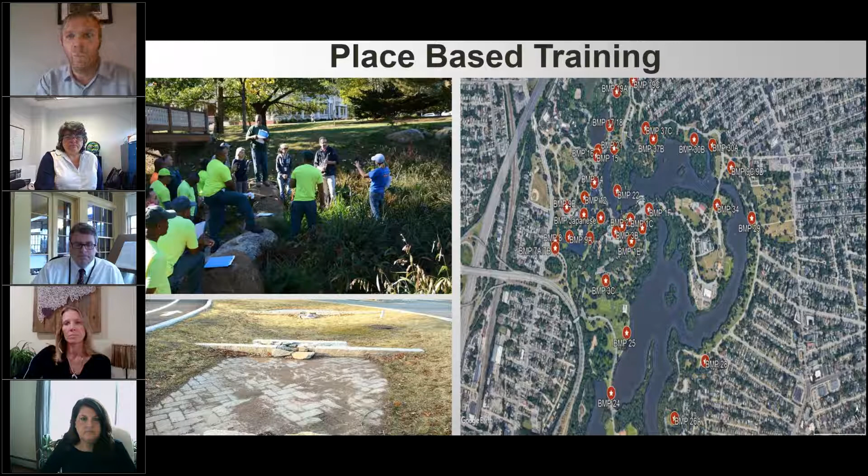At least that's how it works when we're not in a pandemic. Now you get a webinar with some talking faces, a few pretty pictures, but you still get all the knowledge, so hang tight.

We also want to better understand how these green infrastructures function, and so we are working with the University of New Hampshire and the University of Rhode Island to monitor some of these BMPs to see if their real-world performance matches what is being modeled and designed. Also part of this monitoring, we want to see what level of maintenance is required to keep these systems functioning.

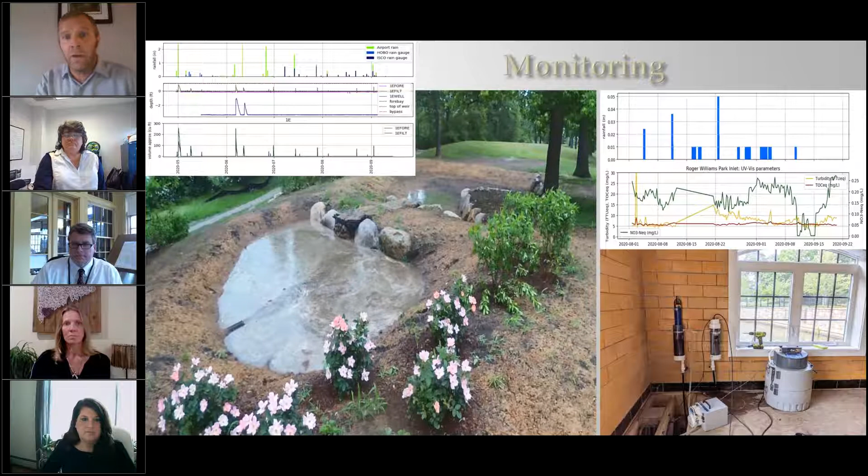They've also installed continuous water quality monitoring equipment in the ponds to try to figure out if all these BMPs are actually changing water quality in the ponds like they're designed to do. And then all that data and information collected from this research is incorporated into some of the different trainings that we host at the Innovation Center.

Our last area of focus at the Innovation Center is to engage and educate the local community about stormwater and about green infrastructure and how the public can make a difference in their own homes. So we do things like give public tours of the BMPs, give general talks about stormwater, put up signs in the park near the BMPs to explain what they are and what they do. We also participate in multiple volunteer monitoring programs to get neighbors from around the park involved in the different types of data collection that we are doing.

And most recently, we held a stormwater-focused arts festival where artists created murals near some of the BMPs, to draw attention to them and raise awareness about stormwater and water quality.

So that's a brief overview of the Innovation Center. We've got a great group of presenters that have an immense amount of knowledge about stormwater management and construction oversight. I will quickly introduce them and we'll get to the presentation.

Brian Burns is the Deputy Superintendent of the Providence Parks Department. He's a graduate of the University of Rhode Island with a degree in urban planning and resource development. He has over 30 years of construction experience, started with the Providence Parks Department in 2015, and now manages projects in over 120 parks around the city.

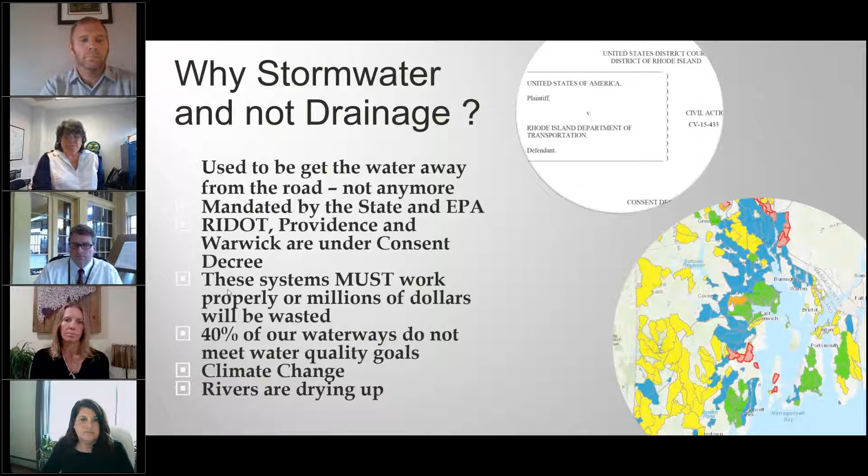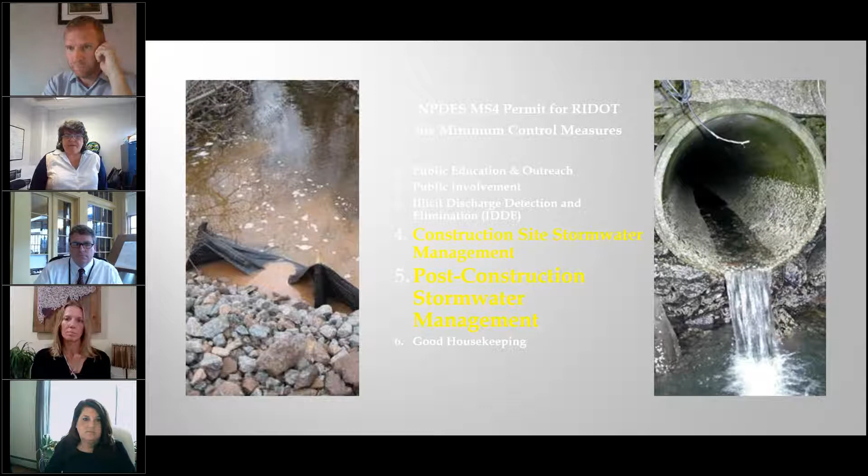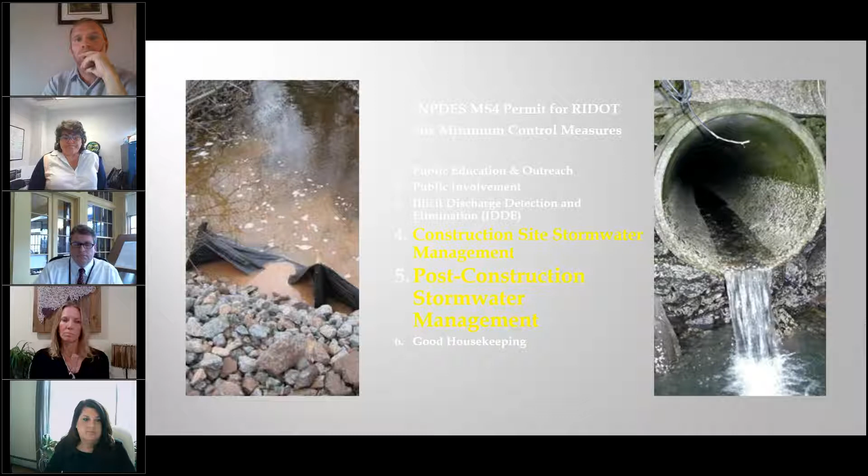So there are 6 minimum measures that every large municipality is required to meet. What we're going to be talking about today is the 4th minimum measure. This is a permit that is issued by the NPDES program, the National Pollutant Discharge Elimination System. So we're going to be talking today about construction site stormwater management, very little, but mostly about post-construction stormwater management - after the job is done, is the water getting cleaned prior to discharge into a river, stream, pond, or lake.

So what you're going to see today is really the building blocks of stormwater. You might hear terms like BMPs and STUs. They are pretty much the same thing. The state of Rhode Island calls it a best management practice, a BMP. EPA calls it a stormwater treatment unit, an STU. So if you hear these terms back and forth, they pretty much mean the same thing.

What is required is building a unit that will accept water. If you see on the far right-hand side, there's always some kind of an inlet. So water has to get into this unit.

And then it is pre-treated, which means that we're trying to drop the sand and large solids out of the unit, out of the stormwater stream. And then there's usually some kind of weir or overflow or way for the cleaner water, without all the sand, to go into, and most of the time infiltrate.

So if you look on the left-hand side, you'll see a curb inlet, and then paving stones for pre-treatment, then a weir, and then this bioretention system that is supposed to infiltrate the water into the ground and get it away from the road, into the ground and out of the rivers and streams directly. But if that gets overwhelmed, it goes into that overflow - you see the grate on there.

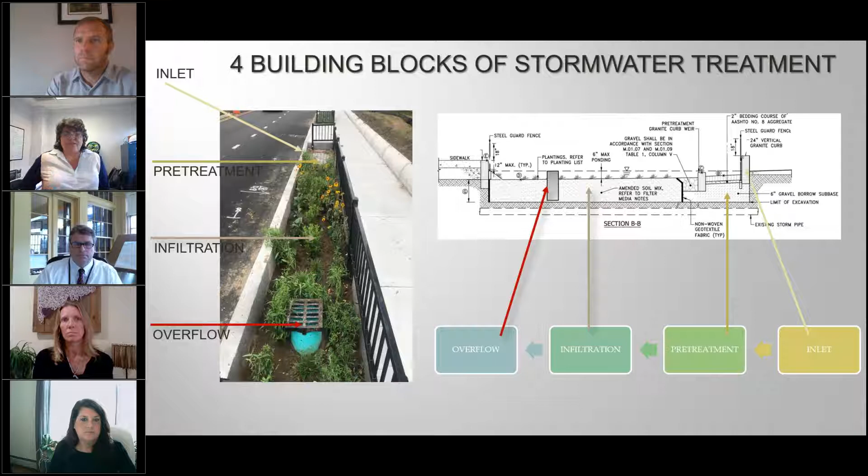Hello everyone, I'm Brian Burns, and that was a great explanation of stormwater. You're going to find those four elements in almost every stormwater site or BMP that you're going to be involved in.

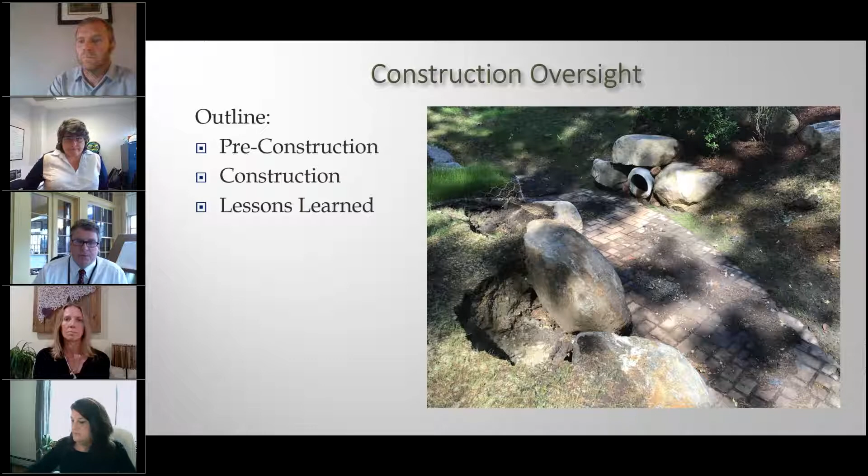So it's pretty simple. Today we're going to talk about pre-construction, which is almost just as important, if not more important, than the construction itself, the construction aspects, and then lessons learned, which we should always do - look at every project at the end, what we did right, what we did wrong. I think that's a big part of what the Stormwater Center is doing now.

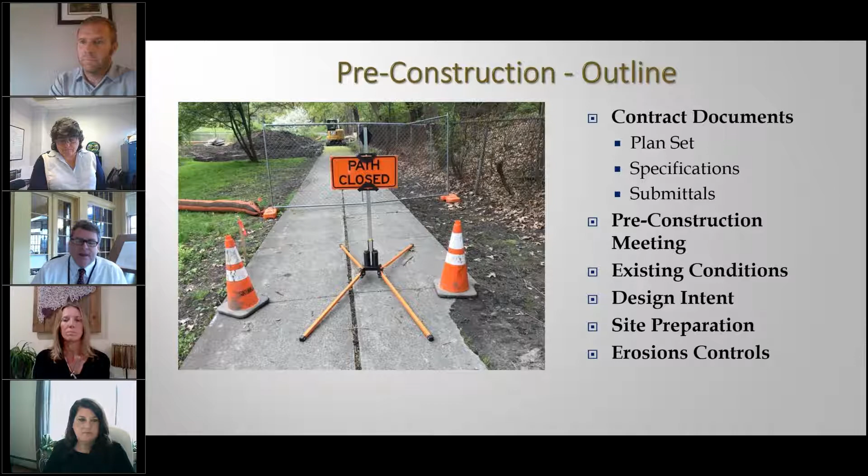So for pre-construction, we're going to talk about the contract documents, the plan set and specifications, pre-construction meetings, existing conditions - where most of your change orders end up coming from, not documenting existing conditions properly - the intent of the design, the site prep, and the erosion controls.

So we'll start with that pre-construction meeting. First and foremost, I see most of the mistakes made in our construction projects here when plans that are issued for construction are not on the site. So you as a contractor, you're bidding plans for bid - there could be alternates, different conditions that exist that change those plans prior to construction. Many times I've gone to the site, we stamp our plans for construction so everyone knows those are the correct plans, they're dated, and more often than not, I see the wrong plans on site. That can cost the contractor money, the owner money.

It's a big problem. So existing conditions, photographs, and the restrictions - like I said before, that's where all the change orders come from. If you haven't documented what you have there, you're going to be hitting utility lines, elevations are going to be incorrect. And dig safe should always be contacted.

And then in addition to that, if you have electricians that work for you, if you have entities involved in whatever site you're at, please get them involved, ask them for the information that they have. A lot of times the people that maintain these sites have the best information about what's there. So really do your research before you put the shovel in the ground.

And then as always, you should be aware of any special conditions, permits, NEPA restrictions. At that point, you want to identify the project team - the contractor, the owner, the engineer - all knows who needs to know who to go to. And there should be one sole project manager that's responsible for everything that takes place on that site, and that should be the last person to make the decision.

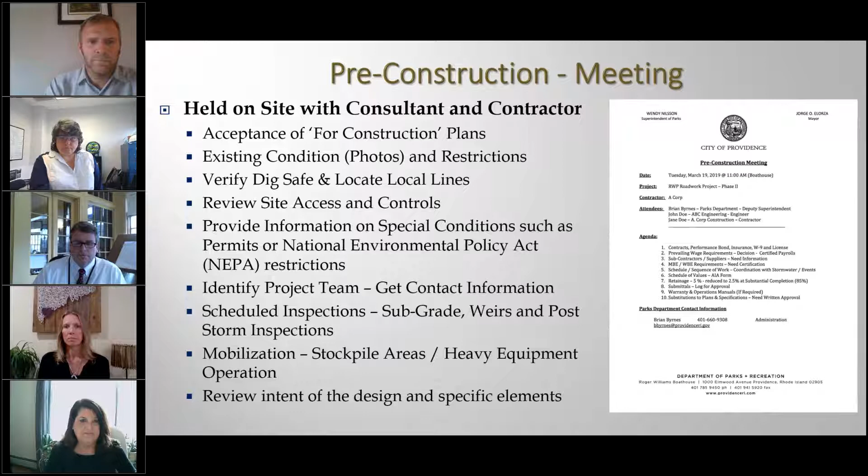Thank you, Chris. So after the pre-construction meeting, once you get underway and put a shovel in the ground, you need to do ongoing site reviews.

The construction set is very, very important. I often ask the contractor to look at his set of plans, so I'm not carrying 30 sets of plans in my truck. We also utilize iPads and electronic equipment to keep those plans and maybe keep your truck a little cleaner. Construction details - you've got to know what the assemblies are.

You could have an infiltration basin with layers of different types of sand, stone and media. You need to know what it's supposed to look like when it's done so you can make sure it's done properly. A lot of times the honor system is in place on these construction projects, and with reputable contractors that can be fine, but you need to know what you're looking at, and you need to know those materials need to be kept separate.

Most important on these earthwork project sites is a construction entrance. Make sure it's maintained as a stone construction entrance - that's pretty clean right there, but as the site goes and we get rainstorms, it starts to get mucked up. If that stone isn't removing debris from the tires, that debris will end up on the roadway, which ends up in a catch basin, which ends up back in probably the waterway you're trying to protect. You've got to make sure that's maintained.

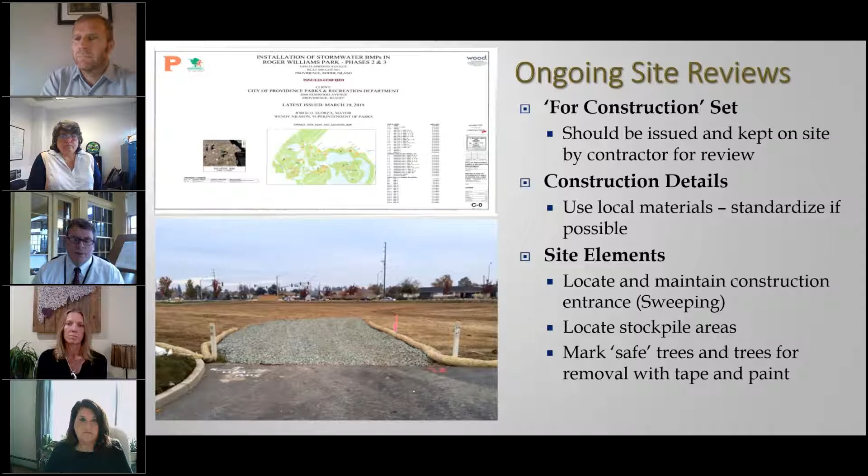When it comes to trees, you'll typically have trees on a site designated for removal and trees indicated to stay. We've used ribbons in the past. We found that if trees are supposed to come out, marking them with paint is a permanent mark, and we'll make sure the right trees are getting pulled. So we ribbon trees to stay, and we mark trees to go.

Another part is material submittals. You're managing 5, 6 projects, you've got a lot of different things going on. There are some real off-the-cuff things you can do to make sure the materials being put in are correct and the right materials are arriving.

We submit on shop drawings, so you need access to the shop drawings and submittals, because that's going to tell you the products approved for this project. It's an easy way to confirm compliance - if you have that data, it tells you what the product is and where it's coming from, and that's easily verifiable when you're out in the middle of the site.

The test data you receive, sometimes done prior to a project manager getting involved, needs to be current. If you get a loam sample tested and it's 3 years old, that loam isn't the loam that's going to be coming to your site. So that test data needs to be current and accurate, and it needs to be approved before it gets there. Then those submittals will tell you who the vendor is.

So if you have a loam sample that you approved from ABC gravel yard, when the driver pulls in with the loam, walk up to him and ask for his slip. They're going to get a slip when they leave. If it says XYZ gravel yard, you know that material is not the right material. So it's a very easy way, without getting into the details of submittals, to verify that the materials coming in are correct. So, packing slips, bills of lading.

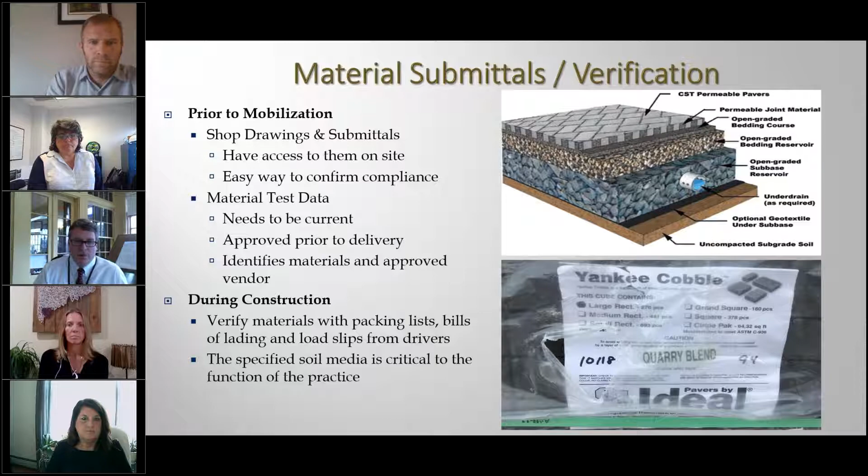Most importantly, in stormwater elements, is the soil media. It is engineered specifically for the task it's been drawn for. If it's not the right media, and/or if that media has been compacted, it's not going to function, and therefore your practice will not function. So you can't look at a pile of soil media and tell if it's the correct one or not. You need to see a slip from a vendor that identifies the product and where it came from. There's no other way to do it. You don't have the equipment to do that.

Another easy way is with samples. You can have samples of granite for wear, hardscape materials. We ask for 5-gallon buckets for bulk material, like that soil media we were just talking about. Any plants that come to your site should have a tag on them. Sometimes at nurseries, they'll tag one or two plants with a certain ribbon with dots on it, and if those plants come in with that dotted ribbon, you can assume it's the correct variety. But depending on the time of year, it may not be leafed out, so it's difficult to tell if those plants are the correct plants. You should require that those tags come on the plant when they get to the site, and then also make sure they are removed once you've approved the planting and we're at a warranty or punch list stage. Removal of tags should always be on your punch list if they're still in place.

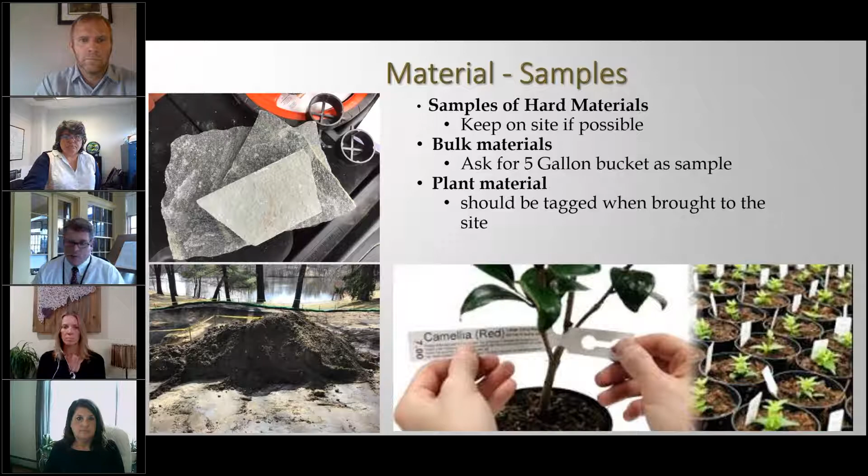So, existing conditions and restrictions - we're going to ask Heather Hamilton from DOT to talk a little bit about this. Heather. Oh, actually Brian, this is coming up in a few slides. I'm going to talk about this.

That's right. So soil performance data should always precede construction. You may be doing an infiltration basin and putting 18 inches of material onto existing subgrade. If the test pits or core samples have not been done, the design only works to the end of what you put in, or the improvements that you made. It doesn't take into consideration the soil that's there. So again, this may not be something a project manager is looking at, but you've got to know that where you're installing these things, it's going to work.

There could also be other things like easements, environmental land use restrictions, which can get very complicated and could be very site-specific, remedial action work plans, and then permits from DEM, and the requirements of those things. So a lot of this is done before you get involved, but you need to know that. You need to know what it is, because you're responsible as the owner of the property for the containment of the soils that are on your site.

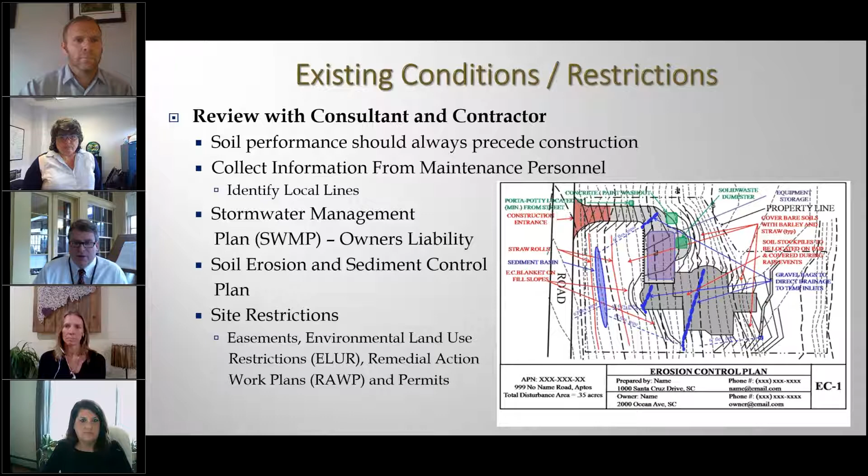The elevation's critical. We deal with this all the time. Elevations are slightly off, and 6 inches can make a big difference when it comes to stormwater. So everything has to be accurate. Hopefully your consultant has done their due diligence and provided you with the correct information. You don't want an open road or an open highway and find out that your pipe is 8 inches higher than it should have been, or lower.

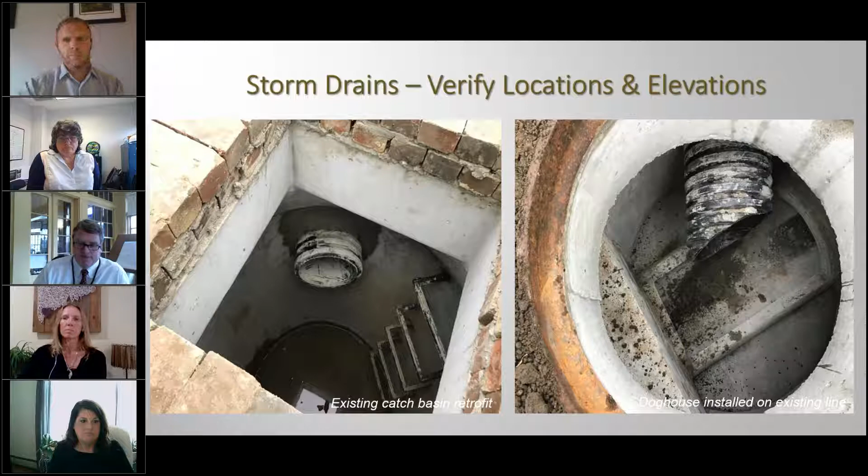We can talk about materials, we can talk about where to put it, but the bottom line is, what are we looking to do here? As Elisa captured it earlier, you as a project manager need to know how this thing's supposed to work. It's not always intuitive. We're going to talk about catch basins on the roadway that are designed to take all of the water, and then there's catch basins that are designed not to take all the water.

Most contractors, when they put in a drain basin, make sure it's in the lowest spot. Well, that's not always the case. You need to know, because what's intuitive to you and what a contractor may suggest—hey, it's actually lower 30 feet down the road, why don't we change this all over and go 30 feet down the road—there could be a design intent not to have it in the lowest spot. So you need to know that.

At that pre-construction meeting, I think Chris talked about it, you want to really get down to how this thing's supposed to work, where the water's supposed to come in—those 4 basic elements. How's the sediment coming out, how it's getting filtered, and if it overflows, where it's going. So that's basically it.

This is pretty simple stuff. Get the water and sediment into the practice, remove the sediment, and contain it in a place where it can be removed mechanically. Slow down the water, because when you slow the water down, the sediment tends to drop out—that's how we get the sediment removal. Direct it to the filtration area. Stop stormwater from entering your waterways unfiltered, and have an overflow in place for larger storms to prevent damage.

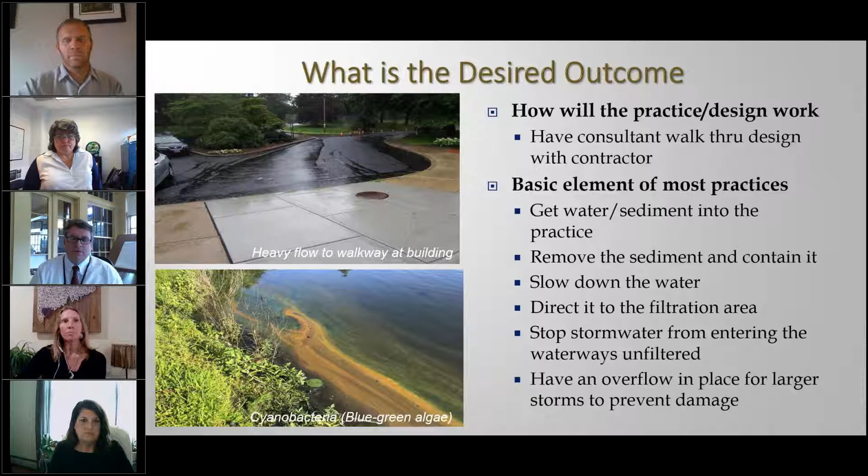Hopefully, the easiest thing to do is have that overflow be part of the existing infrastructure, so you're not spending a lot of money and you're not reinventing the wheel on this particular site. If there was a pipe that brought it to your waterway directly, if you can utilize that for your overflow, that's going to be the most economical way to do it.

So here now we're going to get more into the erosion controls and some of the aspects of those plans we talked about. I'm going to ask Heather Hamilton to take it from here.

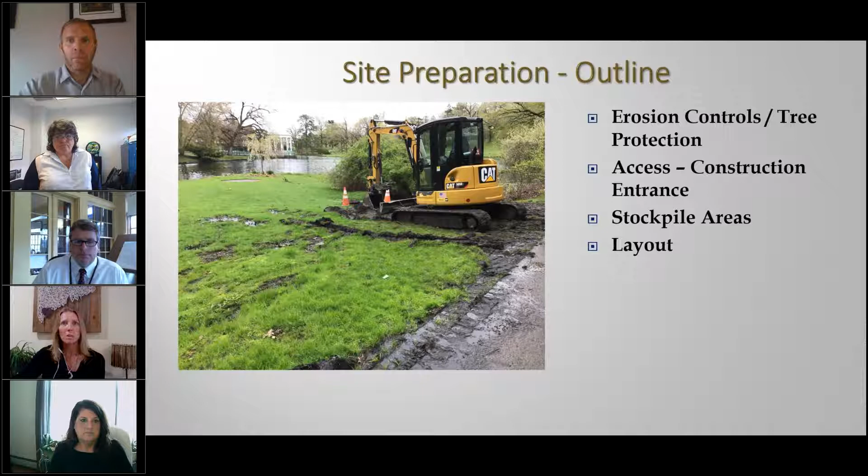Thanks, Brian. For site preparation, most of this will be guided by your site plans and your stormwater pollution prevention plan, also known as a SWPPP, or Soil Erosion and Sediment Control Plan, the SESC. Your site prep will consist of everything from erosion and sediment controls, tree protection, creating construction access points for your equipment, where you're going to store and protect your stockpiles, and your overall project layout.

Also important here is the protection of the location of your stormwater treatment BMP. Simple snow fencing works well to demonstrate that the area should be off limits to vehicles and storage, and we'll talk a little bit more about that later.

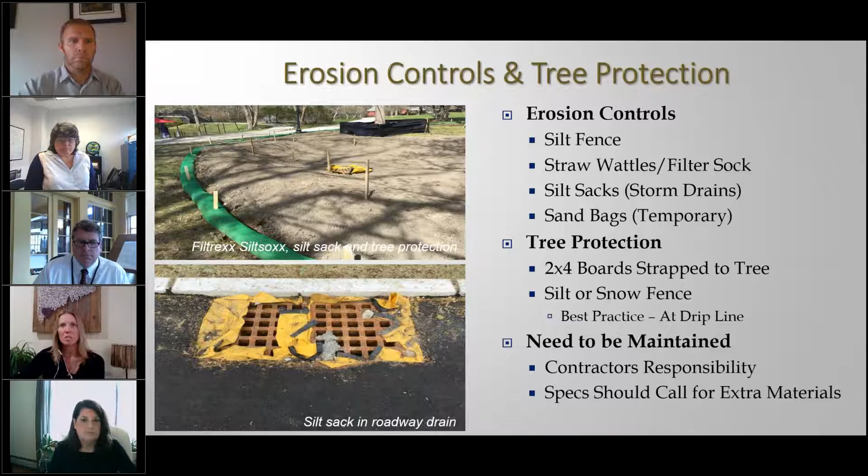So key points here are to make sure that your BMPs are properly installed prior to any earth disturbance, and that they're installed per the manufacturer's instructions or your specifications. We are not only preventing pollution from reaching our waterways here.

We also want to protect and prevent our stormwater treatment BMPs from becoming clogged with sediment and debris prior to them being completed. So you want to make sure that you have enough controls for the life of your project, and always plan to have some on site for emergencies.

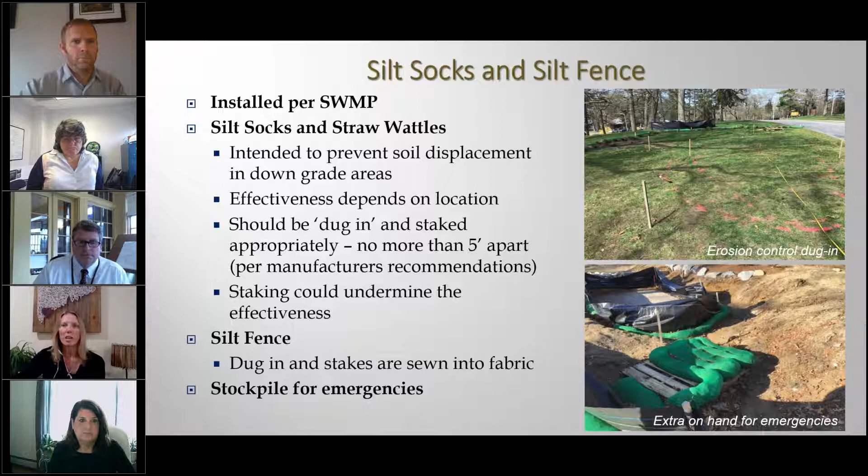All right, so at this point, you've memorized your stormwater pollution prevention plan, you've properly installed all your BMPs, but that's not where the story ends, however. We don't get to set it and forget it here.

To prevent pollution from entering our waterways, regular SWPPP inspections must be conducted to ensure that all of our BMPs are functioning properly and that any areas requiring maintenance are called out and fixed, which the contractors are responsible for. So this includes your construction entrances as well. In Rhode Island at DOT, even if we disturb less than an acre, we still require weekly and post-storm inspections.

So overall, it's in the owner's and contractor's best interest to maintain the controls to avoid costly repairs and possible reconstruction of your final product. An eroding stormwater BMP full of sediment when it's completed doesn't do anyone good.

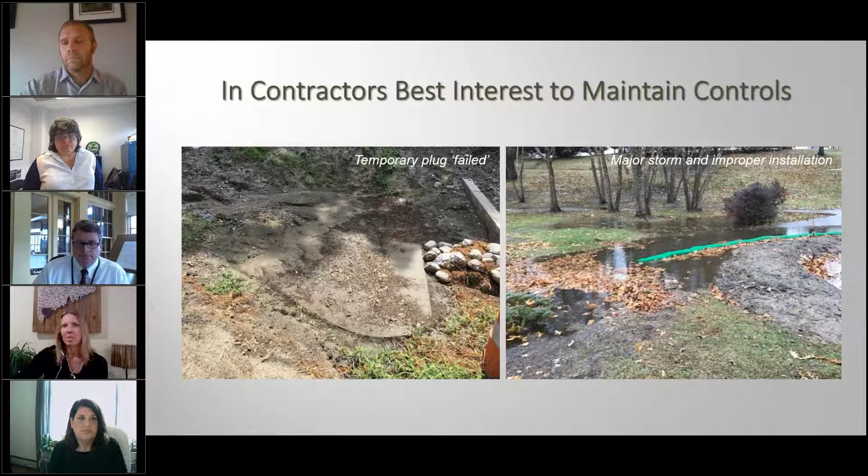Thank you, Heather. So site layout, really important. We look at a lot of plans, and more importantly, your stakeholders, people that are in your organization that may not be as familiar with construction as you are. If they're involved in the project, it's a good idea to get some layout done.

And we use the old-fashioned way. There's total stations that assist in this, and GPS, a lot of electronic equipment for layout. But in the end, there's going to be a grade stake showing elevations with a ribbon for the most part.

And I would suggest that you get out there prior to the installation starting and outline the major areas. Use marking paint on the ground, stakes with ribbons. That's helpful to you because we look at a lot of plans.

We don't realize, oh, wait a minute, that thing's going to go right across a path that everyone uses every day, and you didn't pick it up on the drawing because maybe the path was an existing path and it was lighter than the rest of the drawing, and you just didn't pick it up.

So by doing this, you avoid problems later. It's real easy to change design before the contractor started. Once the shovel goes in the ground, those costs escalate dramatically.

So locate those things so that you can walk it with the consultant, with the contractor, and somebody else in your organization may be involved in the project so that you get a good feeling of what you're doing and what this is going to look like in the end. And they can be deceiving.

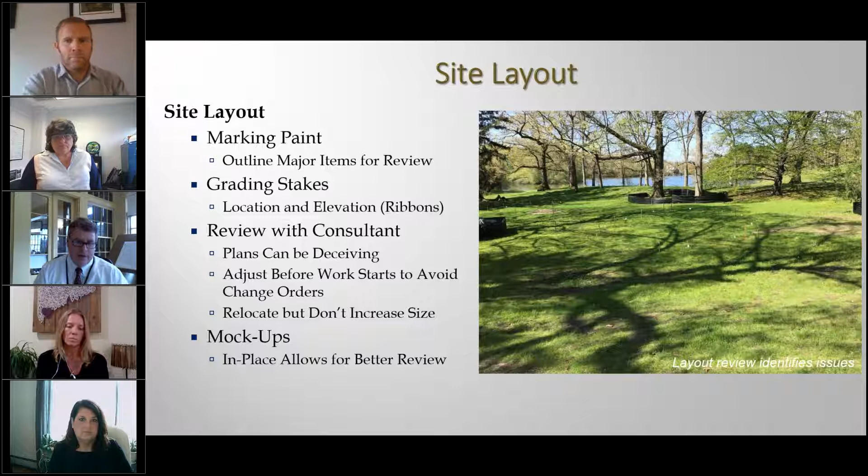Then you actually get to see what it looks like in place, and you can approve it and have them continue forward. These are things that's going to save you money in the long run and make sure the project stays on schedule and on time.

When you do your site visits, I schedule a weekly visit at the same day, same time every week. And then I show up randomly to my construction sites throughout the week. And you need to do that, not that you're checking up on the contractor, which you should be, and you are, but the contractor knows what the plan says and he knows what he's supposed to do.

But when you get to these sites and look around, you may be reminded of other things - oh, we do an outdoor movie over here, if we're moving, okay, there's a problem there. The contractor may have no idea that outdoor movies are being put on this grass area in front of your building, but you do. You've got a lot of projects, a lot of things going on. Just physically getting out there and walking it reminds you of other things they don't know about. Photographs - again, I take thousands of photographs.

It can help you later if there's some type of litigation. It gives you the time frame for the work. Someone may call and say somebody fell into the stormwater thing in January, and you can provide documents that show the construction project wasn't even taking place at that time. It also tells you the work was done correctly. Particularly for utilities, if they're installing new pipes or lines, taking pictures gives you an as-built to back up on, but a picture is 1,000 words. Look at that picture, line yourself up with a landmark that's going to remain when you photograph a pipe, so you get an idea where it is. It avoids conflicts later and protects you. Sometimes contractors give me a look when I'm out there taking pictures, but it protects them as well. We get calls for lawsuits - somebody tripped and fell - and we've saved more than one contractor from being sued themselves because we documented when their work was taking place.

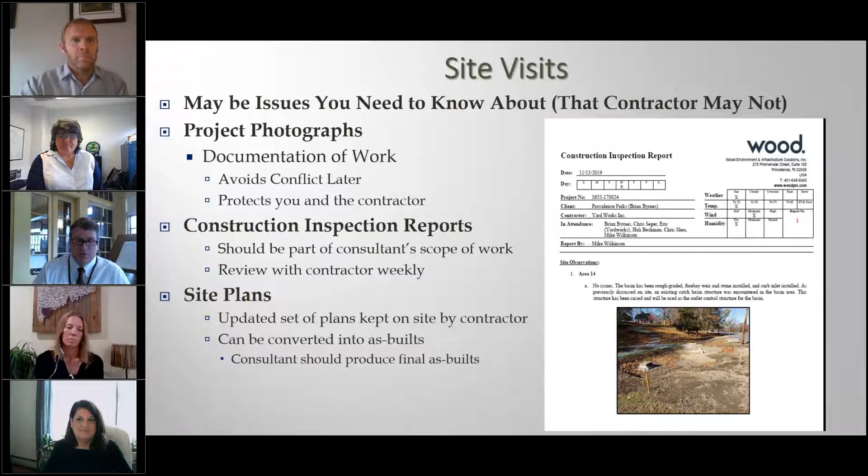Always have an updated set of plans - the contractor should maintain them on site. In the end, we're going to ask for as-built drawings - if you don't, you should be. Here in the City of Providence, we require that as-built be done in AutoCAD, and we've recently required that the consultant provide the final as-built to us versus the contractor. So while the contractor is marking up that set of plans, identifying distances, locations and changes, he would send those plans to the engineer and compensate them somehow. The engineer would incorporate it into the as-built AutoCAD drawings they already have. Part of their scope of work is to verify the as-built, so I get a really accurate set of as-built drawings in a format I can use for the next project or for compliance with a permit. It's very valuable - getting a set of drawings covered in coffee with pencil marks and somebody's phone number on them isn't as useful as a plan that comes in an AutoCAD format you can use with your design equipment. This construction drawing should be relayed back to the as-built.

Means and methods - you're going to tell somebody how much stone there is, how wide a swale's got to be, and that's kind of where your responsibility ends. The means and methods - how the contractor brings that stone to the site, how the contractor excavates that material - regardless of you identifying compaction areas and making sure they're not driving over critical items, it's up to the contractor to figure out how to get this project done.

We tell them what we want, but we don't tell them how to do it. And safety should always be the first thing.

This is the Japanese garden in Roger Williams Park, and they were installing a new weir, and this is the method they came up with. I didn't sleep much during this week that we were doing this, but they're cantilevered over the waterway on large sandbags with a mini excavator, and it was sketchy. So as long as you're confirming that nobody's getting hurt, but ultimately it's the responsibility of the contractor to make sure that his employees are safe and that the methods that he uses are correct.

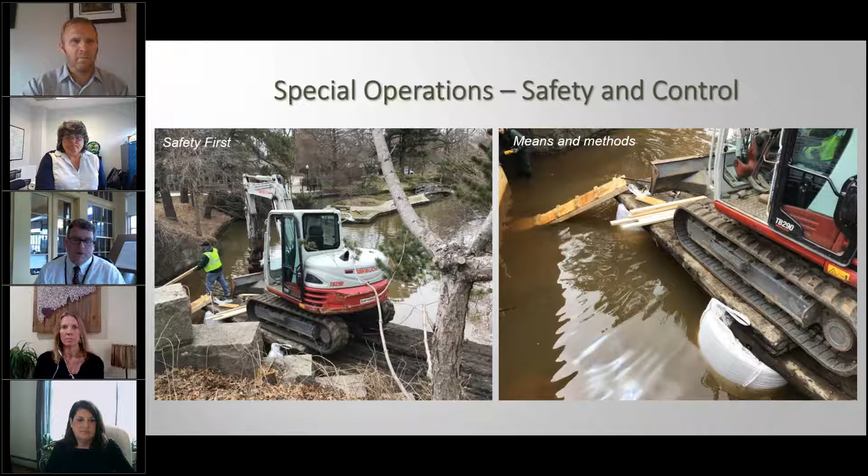So you've got to be conscious of it. And then we have to protect our work. So the level of protection should be equal to the level of danger. So we all talk about

temporary fence. You can install chain link fencing around these sites to make sure people don't walk in. I just love that my guys came up with this.

We had a seal statue that was being unveiled, had a ribbon cutting. It was a big event, was much anticipated. And putting a plywood box over it in an urban area doesn't always last, but we find 'danger high voltage' always works. Nobody really wants to touch that, but that's what it's protected with. I just like that photo.

So, okay, the project's ongoing. We're thinking that the contractor's doing what he's supposed to be doing, and hopefully he is. How do you verify it?

So oftentimes, even when your consultant does come out, they're not shooting grades. They're not looking at the flow of the water. They're making sure that the products that are supposed to be used are being used and they're being installed the proper way. But there's a limit to what they can do on a 1-hour site visit weekly.

So when it comes to stormwater, the best way to determine if these things are working is during construction. If you get a rain event, and if you look at the photo on the top left, our stormwater element is on the left-hand side, and there's a scupper you can see if you line yourself up with the backhoe, and our water is running down the right-hand side of the roadway. In this particular case, we had two contractors.

Water doesn't lie, right, Brian? What's that? Water doesn't lie, right? Water does not lie.

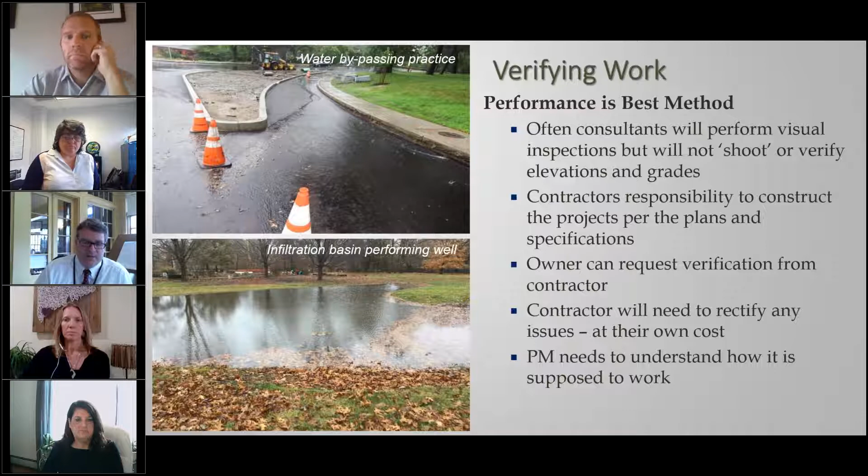So I'm going to ask Heather to talk a little bit about this, about some of the things she saw at a DOT job that she did. Heather, you want to weigh in on this a little bit?

Yeah, thanks, Brian. So Brian was talking about the importance of verifying work as you go. This is a perfect example of an unfortunate incident where that didn't happen, because this is at the final inspection.

However, in this case, the unit was constructed with the weir either lower than the infiltration area, or they included extra soils and other materials in the infiltration area.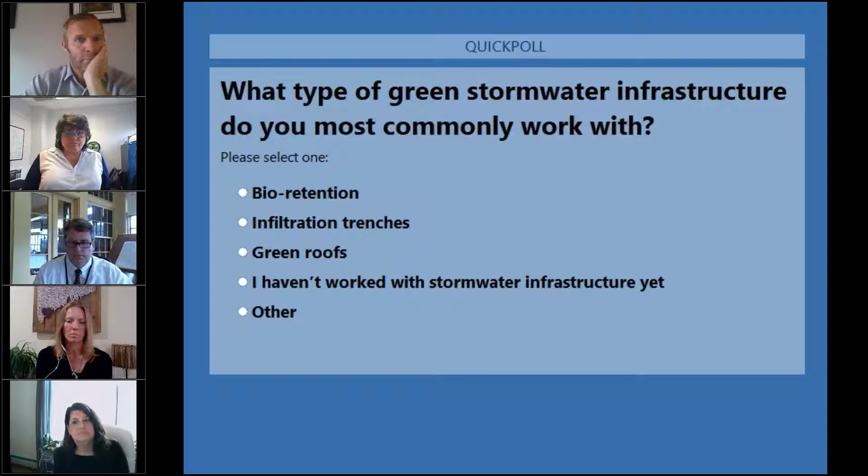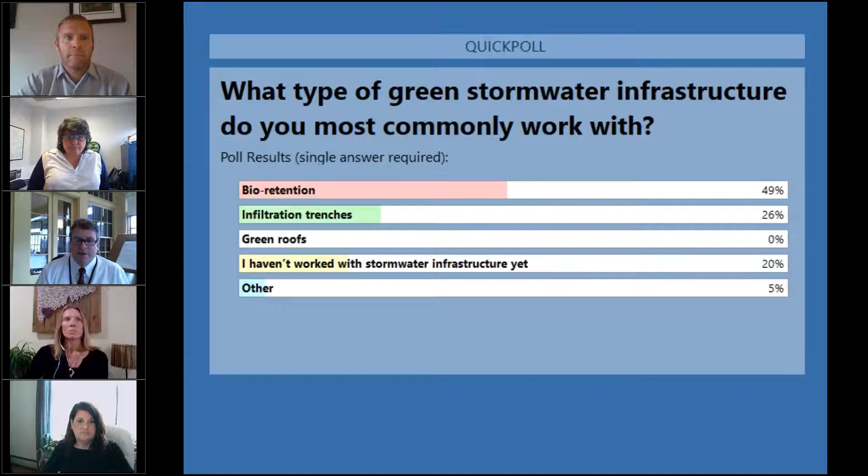Thank you, Tess. So now we're going to get into the elements of the stormwater sites a little deeper. There's 3 basic areas: pre-treatment, treatment and infiltration, and then slope stabilization. And we'll talk a little bit about all of those, but I just want to preface it by saying...

The top left photo is a forebay, and a lot of you may not have seen a forebay that's made of pavers. We have, here in Roger Williams Park, developed a forebay that is made of either permeable or impermeable pavers. So a lot of times this is your riprap stone. It's the same thing. It could be river rock, but you'll see a lot of pictures that show pavers, which is something you may not be used to. So I just want to make sure we were all aware of that. It's all the same thing.

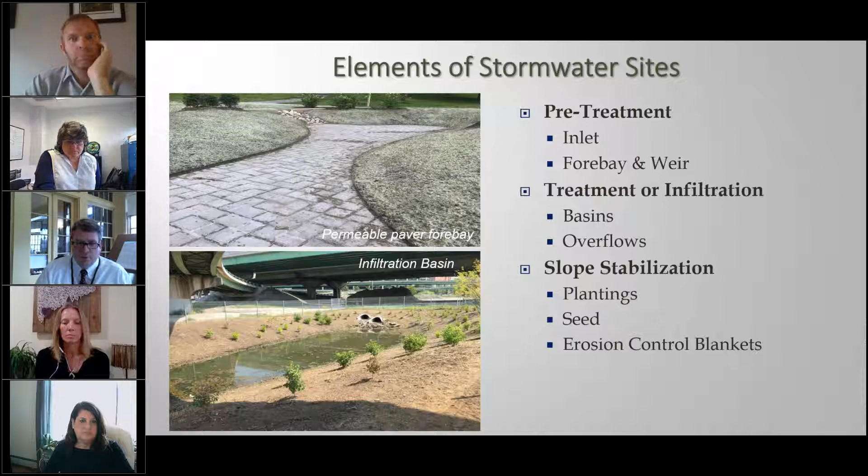So inlets. There's many different types of inlets, but there's 2 different intents from those. But basically what it does is allows water into the BMP, the best management practices. The design will determine how much of the water is going in there. So not all inlets are intended to take all the water.

So you as a project manager need to know low flow utilizes the roadway as an overflow, and it usually goes to an existing catch basin down the road. An inlet that takes all the flow forces all of the water into the practice and then relies on the overflow pipe in the infiltration basin to remove the excess water.

So I'd like to ask Chris to talk a little bit about that and her opinion on that. Chris?

So there are 2 schools of thought on the low flow versus high flow practice. The DEM regulations, and actually most Northeast communities, require that we treat what's called the first flush, or 1 inch of runoff. That actually covers probably 90% of all storms that occur annually.

Higher storms - 2-year, 10-year, 25, 100 - by the time the so-called first flush is through, that's where your dirtiest, most contaminated stormwater is coming from. That's where road sanding's been done, salting, petroleum products that have dripped off cars. These are all removed during that first flush of a storm. So it's definitely critically important to design your practice to treat that 1 inch of runoff.

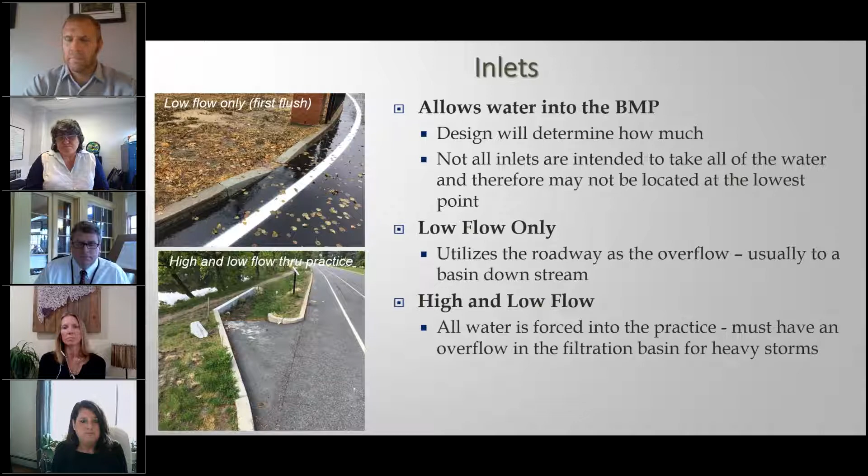I personally like the low flow because it's just a small amount of water. You can control it better. You don't have a lot of the issues during construction with erosion, and you don't have a lot of issues in the long term with trying to keep these areas from eroding due to high velocity. All right, thank you, Chris.

But it can be done. Oftentimes I'd see a sidewalk that's stopped and riprap will be put through it for a scupper, and you're forcing people to walk over the riprap, which is not a good situation.

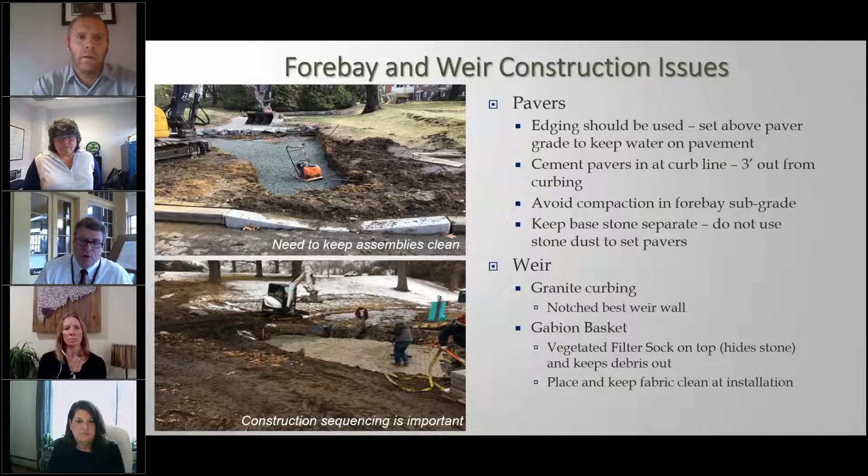So for the forebay walls, if you look at this top picture, you will see that the water is making its way past this weir. So the steeper the slope, the more you can contain. Design standards have typically been 3-to-1 slopes.

We find that the maintenance is too much for a 3-to-1 slope, so we have now suggested a maximum 4-to-1 slope. But what that does is it allows water to make its way past the weir.

So you have to provide some way to force the water through the weir. And it's difficult to maintain the vegetation, which is a part of the erosion control, if you can't mow it, if you can't trim it. So there's a middle ground there.

Then during construction, on the bottom left photo, you'll see real steep slopes in this stormwater element. One moderate storm collapsed them all, and the gabion basket had to be taken out and redone. But you can utilize boulders to extend weirs into the slope, and then you don't have to make those slopes as critical. Double the number of staples on the erosion control fabric on those slopes, and it'll keep them in place.

Infiltration basins and overflow. So we have now talked about getting sediment out. Now we're moving into the infiltration basins. So it filters pre-treated water. It's vegetated - sometimes it has plants, sometimes it has grass.

If your water is getting out of that infiltration basin, dispersing or infiltrating within 2 to 3 days, you're looking good. If it's there for 4, 5, 6 days, you've got a compaction issue. You've got to make sure that you take care of that compaction issue, because it allows the water to flow into the groundwater and then filter naturally to whatever waterway it's going to.

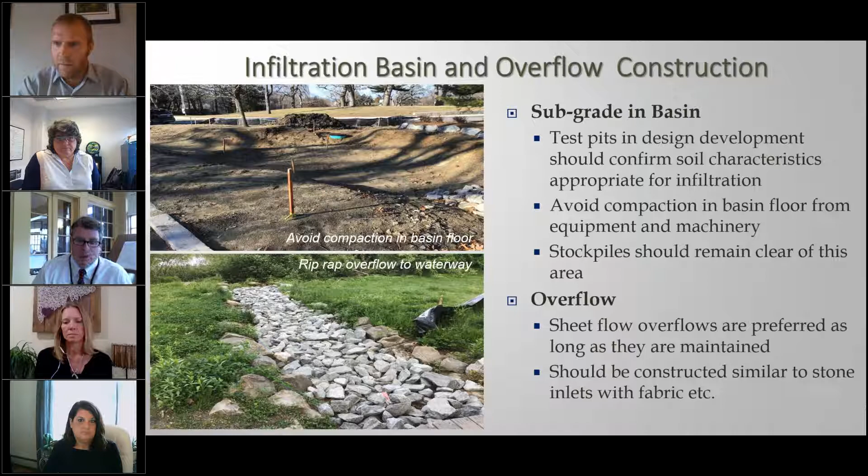Now planting, seed, and erosion. This is usually the final part of our structure, and there are different schools of thought. I'm going to ask Chris to weigh in on plants versus grass for contaminant removal. Chris?

Yes, there are a lot of schools of thought about the types of plants that are best in the bottom of an infiltration or bioretention practice. I think there are certain shrubs that tend to clog the infiltration capabilities. Maintenance is another consideration, but probably most important is the soil beneath whatever plant material is going in.

This goes back to Brian's point about getting your slips on the product being delivered and making sure what's been specified is correct—the engineer reviews the shop drawing, so we get a slip showing it has the right mix, whether it's a sand filter with the right type of sand, or a bioretention practice with the required constituents. Then it comes to the site and maybe it's not what they sent on the slip, as Brian said. So you ensure it's coming from the same place that gave you the testing results, and as the owner, in Brian's case, be very hands-on—always taking pictures, always at the practices as they're being constructed.

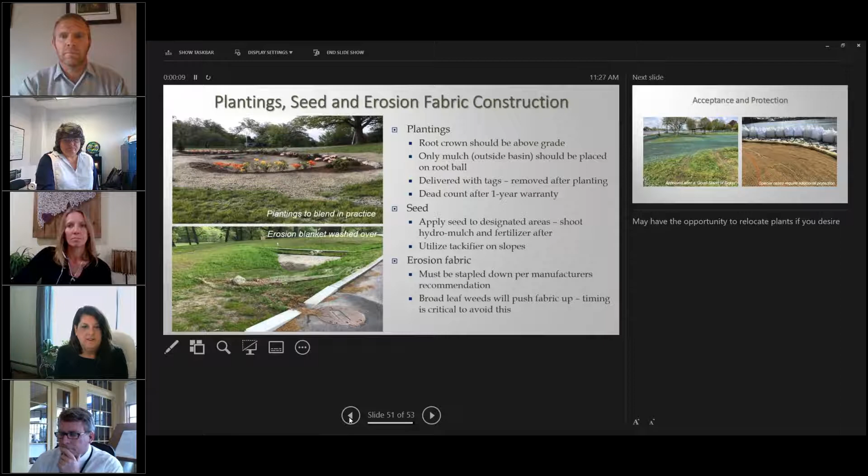I think the singularly most important thing is managing sediment transport, not so much into the sediment forebay as into the final practice, whether that's a bioretention, infiltration practice, or sand filter. The goal is to get the water into the ground, not sitting on top. So protecting those areas from sediment transport, from compaction, from having the contractor drive over what's intended to be an infiltration practice and losing the permeability of the surface. I see it over and over where sediment fills the infiltration practice, and then the contractors aren't happy that they now have to over-excavate the area, scarify the surface, bring in new material, and start all over again. It happens over and over. So protecting that final cell—what was the third step in Elisa's original slides: first the inlet, then the sediment forebay, then the practice—protecting that practice at all costs is, for me, the most important aspect.

For me, I'd say every quarter of an inch is critical when it comes to flow diversion and getting water into the practice at all. You can build this practice perfectly, keep it safe, and then if the diversion weir is messed up, or the elevations of the overflow or inflow are off, the water doesn't lie—it's got to get into the practice. We've seen a lot of situations where water doesn't flow uphill, or the diversion is done improperly. Every inch counts.

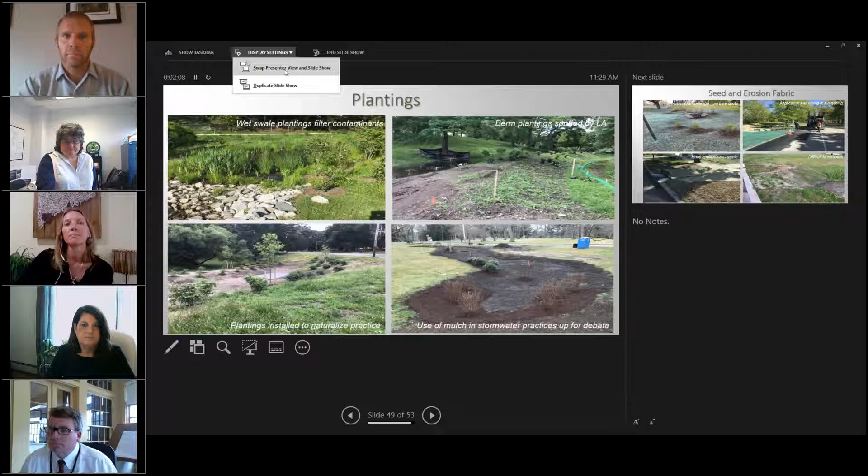I know we lost some time. We can just talk about plantings real quick. There are plantings that filter, and then there are plantings that blend your stormwater element into your site. So we oftentimes...

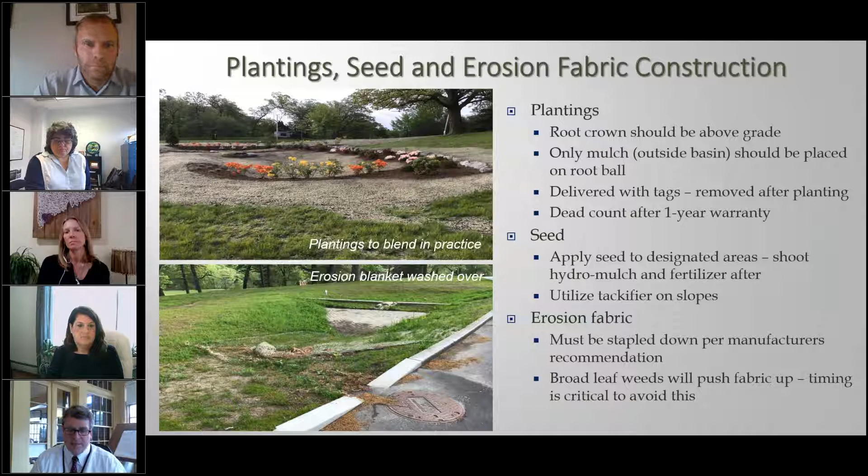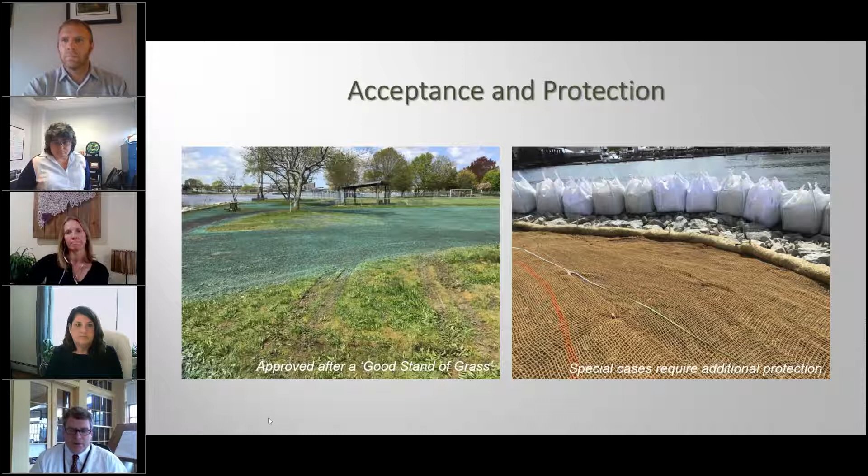So I know we've already taken some questions, but that's the end of the presentation. I don't know if you want to go back to the questions, and I apologize for being tossed off by whomever, whatever. So thank you.

Yeah, sure, we have a few more questions here. This one is about maintenance of paver forebays, asking how you are maintaining them. And then the follow-up question is, have you done any infiltration tests to make sure the spaces between the pavers aren't clogged?

So I'll go first if you don't mind.

The paver forebays allow you to see when sediment's collecting immediately, and it's an easy practice for our crews to check, because it takes them literally 5 minutes. Having your crews do maintenance once every month or every couple of weeks when it takes 5 minutes is a much better practice than doing it once a year removing all the river rock, washing them down, removing sediment, and putting the rocks back in. They just don't want to hear it, it's too labor intensive. So for us it's been fine. We do need to use a power broom at times to get the rice stone out from underneath the joints in the pavers, then hand dress it back in. It's simple. Our guys have told us it's night and day compared to what they used to do.

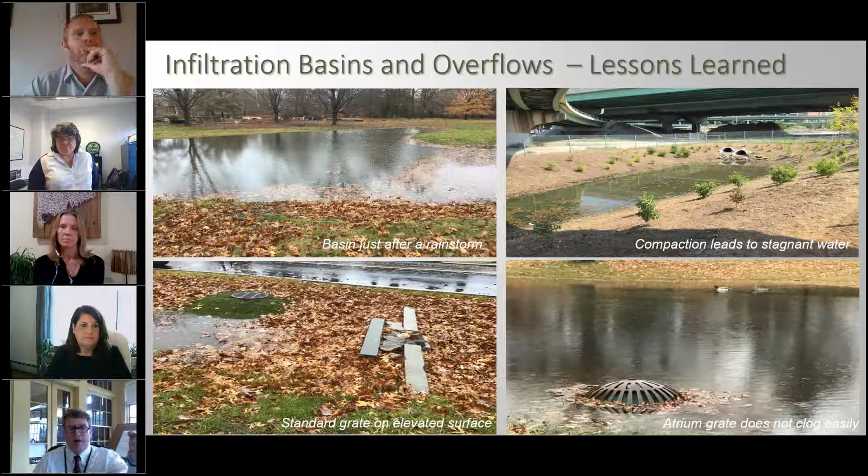Can you show that grate on top? You mentioned something about the concrete or cement to hold it in place. When we put those sidewalk drains in, we had one where the end of the metal grate was exposed, so you could literally pick the middle grate up once you took the two bolts out that hold it down. So what we ended up doing was carrying the concrete around the back side, fully encompassing all sides of that drain in concrete, making it more difficult to get out.

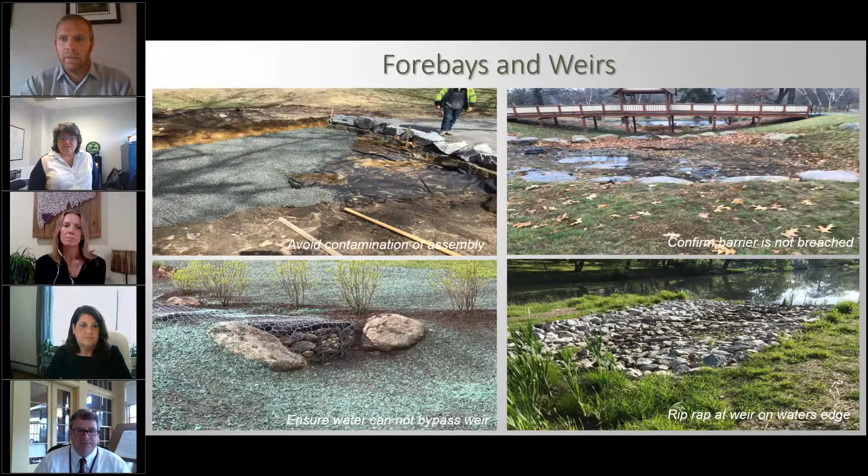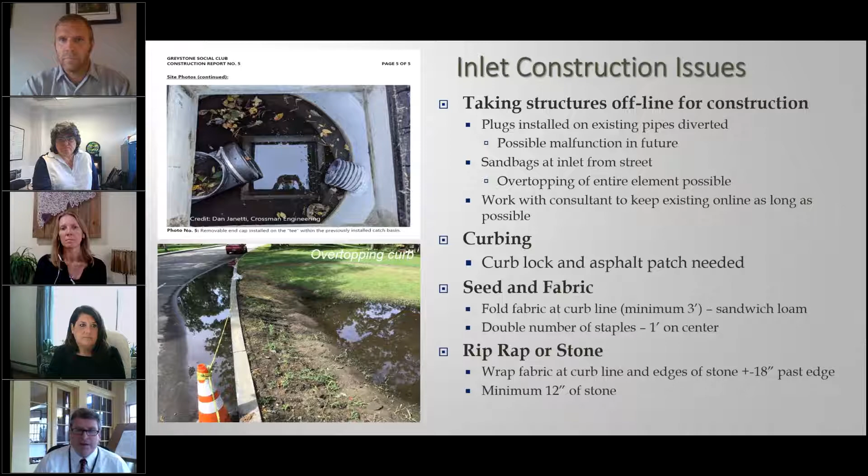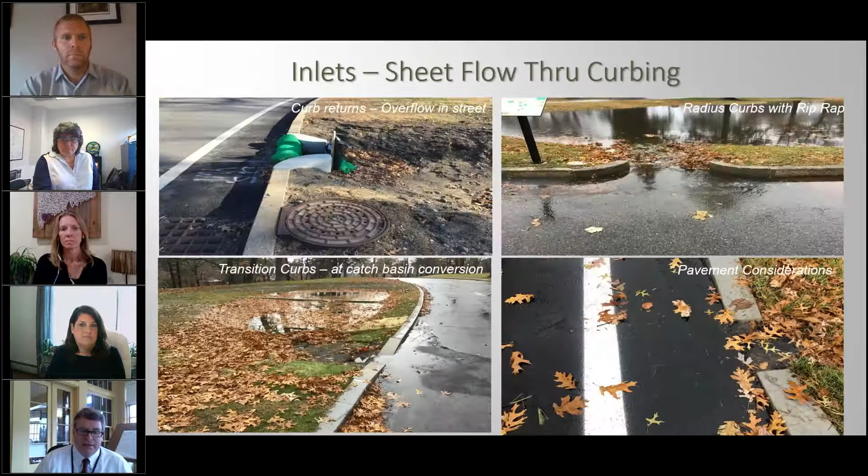I've seen all sorts of versions of this everywhere I go. I've seen plates just dropped in and resting on concrete with no mechanical attachment whatsoever. They're never in the same place, people move them, they're on a sidewalk, and they become a trip hazard. I've seen these done wrong more often than done right. At dusk you can't see it, you walk over it, and you're falling. It's a trip hazard.

This is the photo: bottom left, you'll see concrete that encompasses the entire drain. The photo on the right, this drain goes all the way and daylight's at the end, so there's a void created underneath the concrete where the water flows out. Obviously this one is just open at the end, so vandalism and potential movement should always be a consideration.

One more question: about the specific erosion control material called Curlex, which contains nylon netting that's apparently not ideal. This person is wondering if there are good alternatives that we've used instead of Curlex.

There's a company called North American Green. They have a multitude of erosion blankets based on velocity and the amount of water running over it. There's biodegradable and non-biodegradable, with different times for these meshes to degrade. If we're putting fabric in an area we're going to mow regularly, we want a fully biodegradable fabric so the mesh doesn't get caught up. You've probably seen it—it's like a fishing line mesh that gets caught in a mower. It's not safe, and it's unsightly.

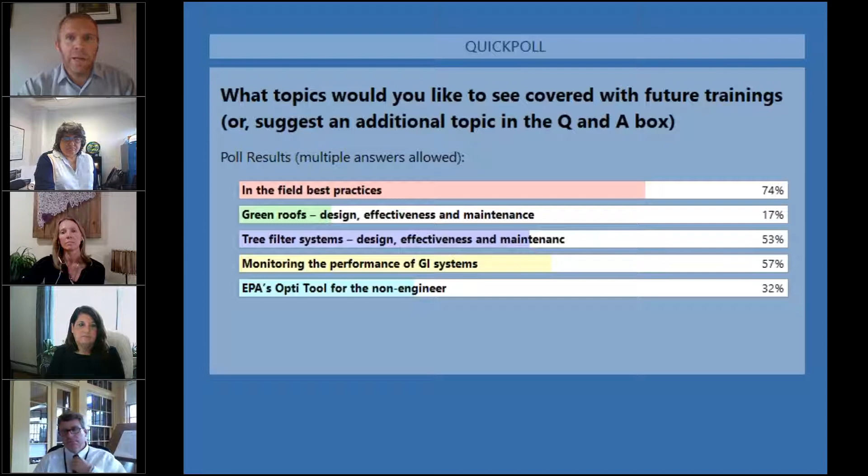Okay, all right, that gives us some ideas of future trainings that we can hold. So thank you very much on that.

We wanted this training to be in the field. I think there's a lot of information to cover in 2 hours. Here at the Stormwater Center, we could do a classroom for half a day and then walk out into some of these sites and talk about what we learned. I think that would be valuable if you're a project manager, or even if you're one of my counterparts in a municipality and you've maybe just gotten a consent decree. There was a big learning curve for most DPW directors or parks personnel in stormwater - it's not something they used to be involved in. I was a contractor, so I had more experience, but I wouldn't even know where to start if I didn't have that experience. I knew engineers from when I was a contractor and I reached out to them. So there's a much bigger training needed, soup to nuts - you need to start putting in stormwater, what do I do, all the way through to how do you close it out. We'd love to give that training.

Okay, and here's another question. It says, is there a precedent for using the stormwater system location as a temporary sedimentation control for construction? It says often contractors build stormwater facilities first and then have to diligently protect them for the duration of the construction process. Are there considerations for doing construction stormwater controls last?

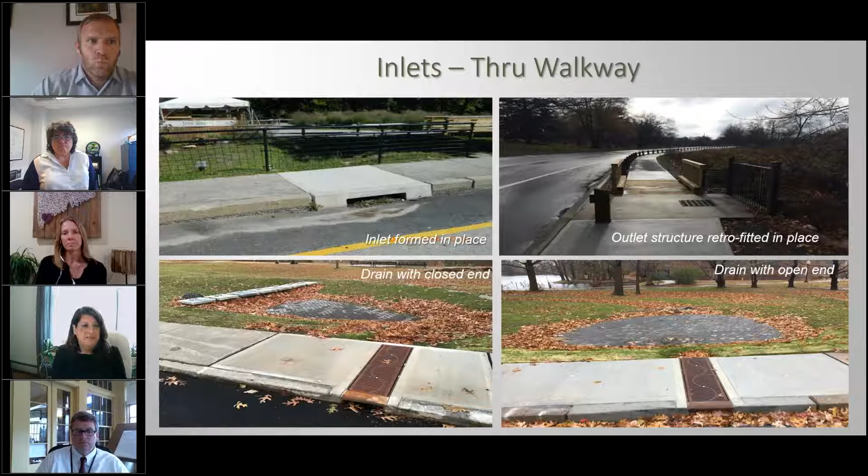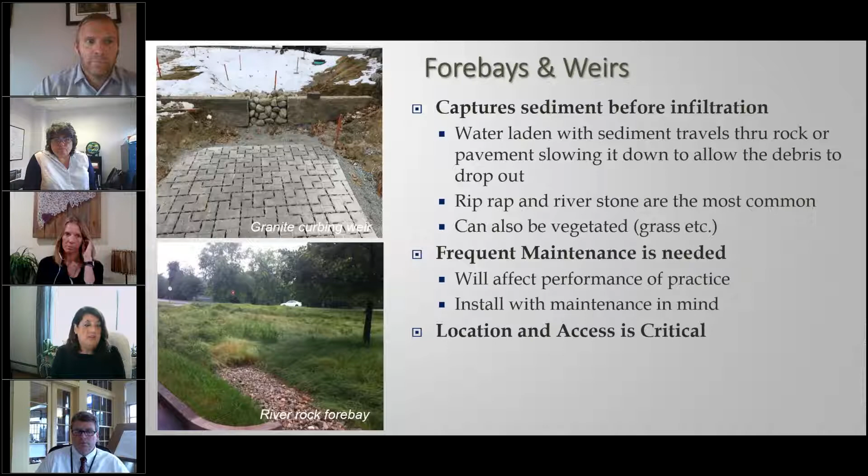I would add that in a lot of cases, we do install sediment traps and sediment basins up gradient of our practice. At Roger Williams Park, a lot of these photographs show very tight construction - it's adjacent to the road, disturbance of a historic park that's intact. In order to put in some of these sediment traps, you would have to disturb more of the park to do it. So as Elise said, where you can, not having to put those in is beneficial in this situation, but certainly on larger projects...

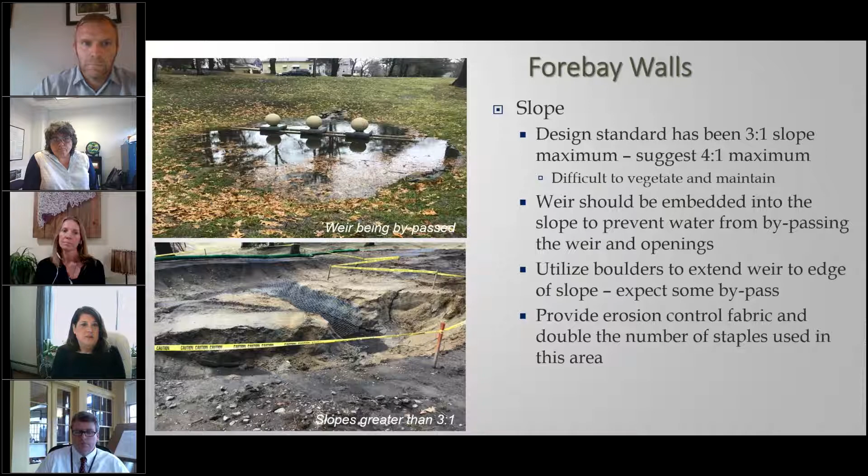I'm currently working on a solar project - solar projects are the worst because you're opening up a phenomenal amount of area at one given time, and sediment traps and sediment basins are absolutely required in those situations.

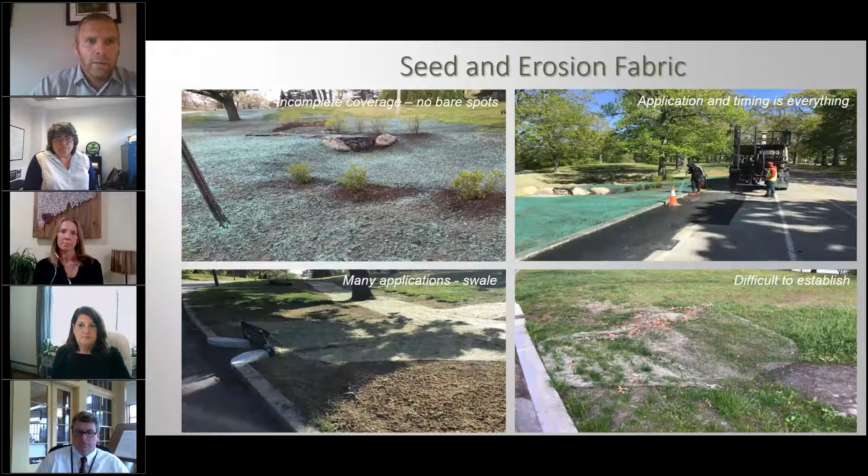Okay, we've got a couple more late questions coming in. It says, are there other forms of slope stabilization that you would recommend to prevent erosion, such as infiltration trenches, berms, or terracing for areas with steep slopes?

One of the easier, traditionally more used methods is riprap. You can riprap the slope, just place the riprap stones on the slope itself. That's going to hold it in place. That's one of the easiest. We're trying something interesting.

We did have an area where it wasn't really a stormwater practice, but we were trying to control erosion. In lieu of using riprap or an erosion control fabric, we've actually cut into the slope and installed a 1.5 foot high living wall practice. That's a Filtrexx practice, so we are creating terracing down the slope. We're hoping that leaving the vegetation unmowed across the Filtrexx sock, the so-called living wall,

will dissipate velocity, and the drop will also dissipate velocity. So it levels out the grade between the living walls, that slows velocity, and the drop and vegetation should help. That's actually something we're trying out at the park.